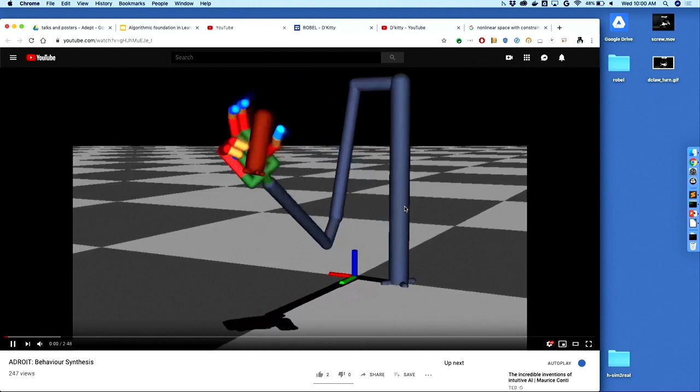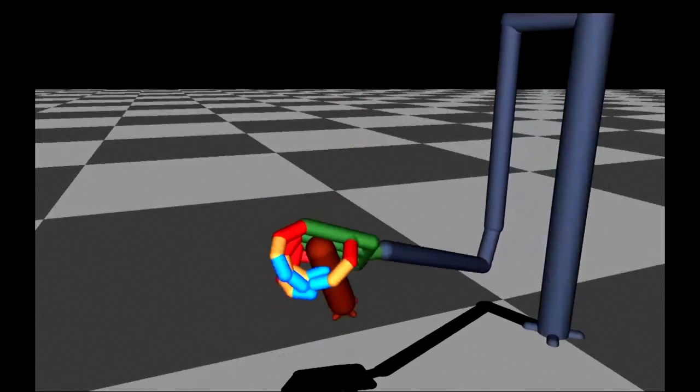Using these techniques, we have been able to show very dynamic movements of this order. Roughly, the dimensionality of the system we are talking about is about a 60-dimensional system. We have full access to the ground state and full access to the dynamics function here. The objective here is there is a hand with about 30 degrees of freedom, and a 6 degree-of-freedom object randomly falling in the scene. Your objective is to stabilize the object—you know it has to be up there in the air somewhere, and all the details of the movements are automatically synthesized.

You do not tell anything about the details of the movement, so that's the beautiful part. When you have access to the dynamics, we have planners that can do amazing things.

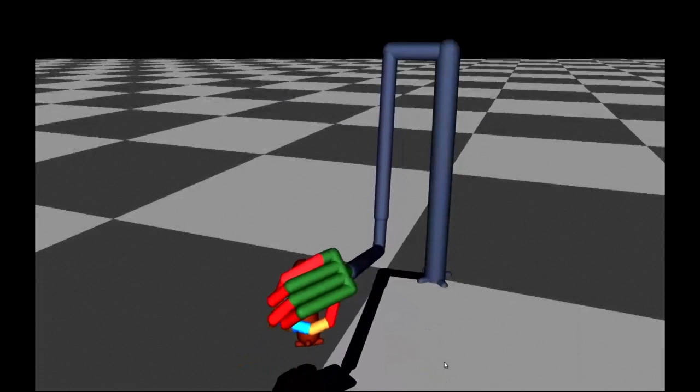And you will see it fails. It's trying to slip, and it kind of re-optimizes, which is one of the lessons, that fast re-optimization can give you a lot of things. And another beautiful part of this is it's reusable machinery, which is also something we want.

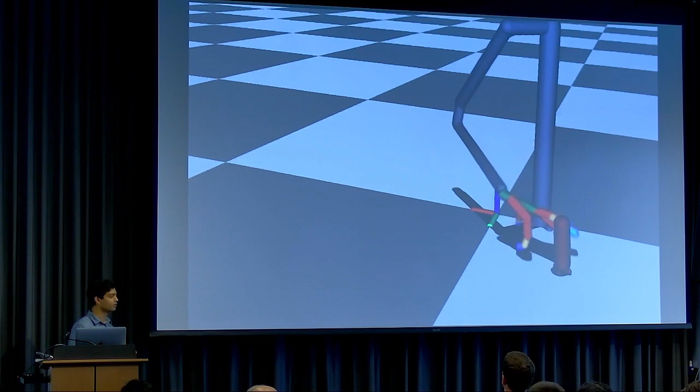It can take the same machinery, we ask it to do typing, just change the goal state to something that says typing, and you can on the fly keep updating the goal. Since it's constantly replanning, it adapts, it does nice things.

You can apply perturbations, replan, etc. Things glorious, everything happy, robotics is solved, we can go home. All right.

I want to take my take on why I think MPC actually works, and it does make sense in the real world. When we are executing, we are never executing to the optimum. So even if we know how to get to the optimum in a provable way, it probably doesn't make sense to spend that compute to go to the optimum. You're only going to execute for a little bit, so your best bet is to get a good plan in this small narrow horizon. So focus your compute over there, get the best update you possibly can, and leave everything to hope.

But can we do better than hope? Yes, you can do better than hope, which is what we call the value function. You put the value function at the end, and that kind of gives you the hope. You extrapolate based on the hope. But the thing is, we overfit to the current situations, and you just hope that carries forward. And then replanning does the magic for you.

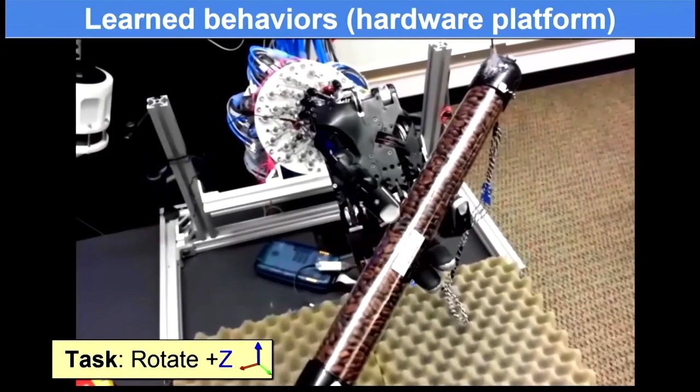Let's start looking into a demo of what we can do over here. Again, a human hand-shaped robot. What we are trying to do is rotate a free-floating object in space along different axes, X, Y, Z, and you can see that over there.

Most of these behaviors are learned with 60 trials. So we are not talking about thousands or even millions, thousands. We are talking about just 60 trials.

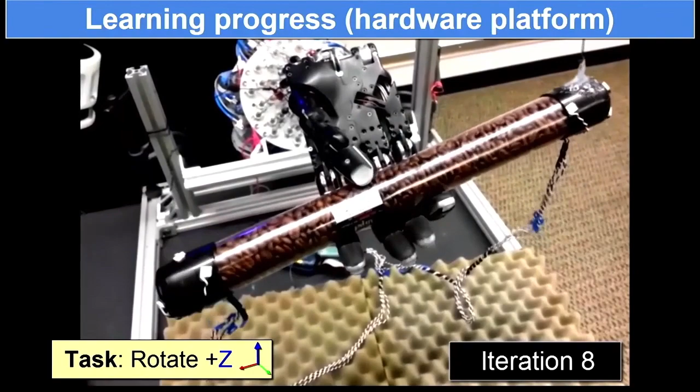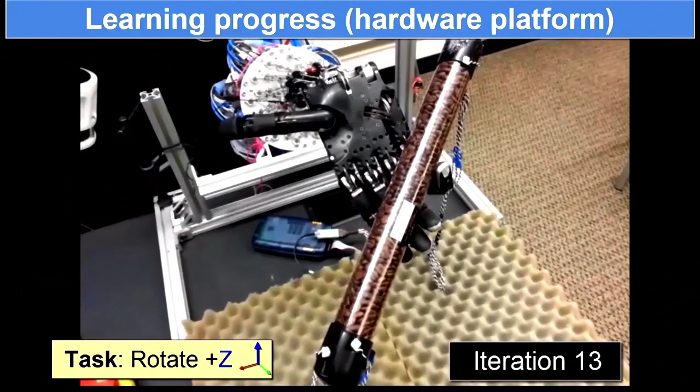Agreed, these things are very simple. We are trying to do simple things like rotation, but if you see the kind of behaviors that need to exhibit in order to get those things right, it's quite complex. The pinky has to push, the middle finger has to pivot, the thumb has to get in and out, and the whole system has to stabilize, because initially what you'll see is that it will just drop the whole thing. It doesn't even understand how to stabilize the system, and it'll start dropping the system.

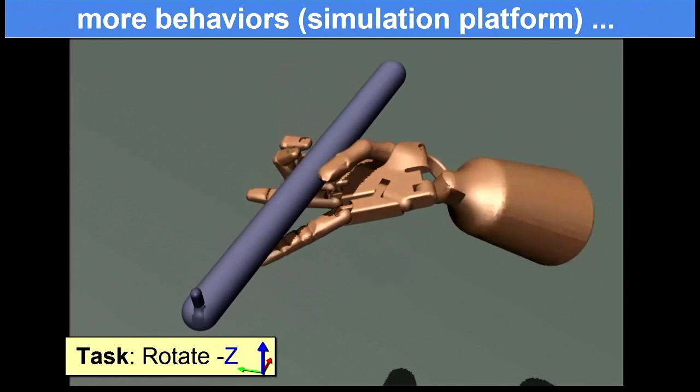And it is general, again, in the same sense that you're building a model. Given the model, you can do a lot of things. And since you can build a model easily, a benefit of MPC, you can repurpose all of those things into different behaviors.

Over here, each iteration is roughly 5 rollouts. So about 12 iterations is about 60 trials that we have done. So what we're able to show right now is an extremely sample-efficient process.

It can work with contact dynamics, which presents a lot of constraints in the actual dynamics. So these are not smooth dynamics, and it does work in a real system.

But there is an interesting thing going on over here, that it did converge, but what happened here? What we ended up doing in this case is you start the system at the same place initially, because it's not good. So you want to help the system by starting it more or less in the same place, and it's updating its own estimate so it iteratively gets better and better. But the moment you think it has gotten better, now you start destabilizing the system.

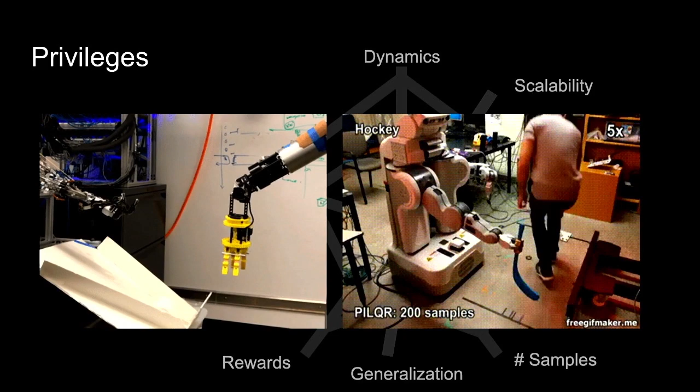This is, by the way, I want to show how resets, for example, are taken for granted, and it takes either 4 months for you to design a reset mechanism, or a grad student spends 4 months doing the reset for you. This was me as well when I was doing the cube rotation, the tube rotation thing. So a lot of these things are the real bottlenecks now as algorithms try to scale and actually go out into the real world. I think a lot of these assumptions are really where things are weak, and we need to hit them hard.

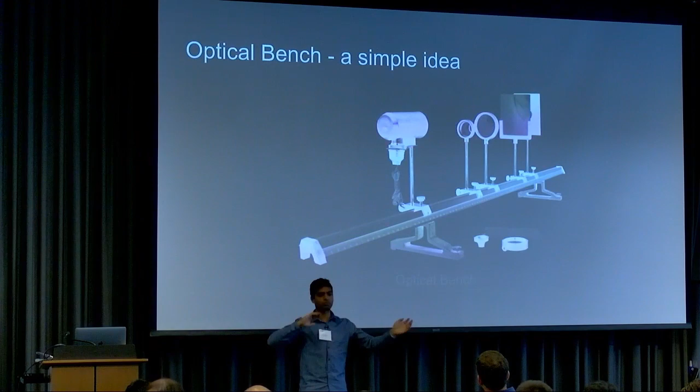Okay, so demo time, I'm going to give a short spiel on what the demo is and why it's important. Like I said, there is this huge spectrum and axes on which we're trying to minimize the area of all the algorithms, right? But it becomes important to actually be able to probe those settings equally well. This is not where I'm trying to solve the DARPA robotics challenge. This is not where I'm trying to do an Atlas backflip. This is basically pure science, trying to minimize the area of this curve.

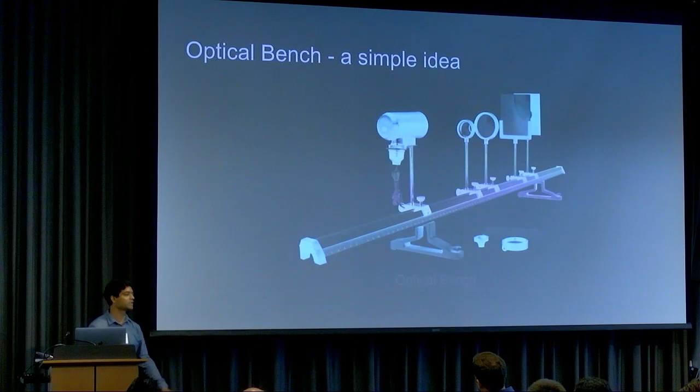So in those settings, I think I take intuition from the domain of physics, where what they did was design something called an optical bench. Most of the Hubble telescope, electron microscope, etc., those intuitions were first tested over there, and they led to bigger developments when people scaled and found the right fundamentals. This is what I think is somewhat missing for robotics right now, that everyone is trying to do a lot of things where things are different, and there are a couple of platforms on which I'm trying to build my intuition, and I'm going to share these things with you guys. Starting today, it's going to be public and online, so feel free to share with everyone.

These are robotics benchmarks for learning. There are some important, interesting things over there as well. So let me try to just show you really quickly. There are a few benchmarks, a few hardware platforms which are very modular. The interesting thing about these platforms is that they're modules you can reconfigure in any way you want. Here are the 3 settings I've shown you guys, but if you have different applications, just go for a different application, and the same thing is going to work for you in terms of software and hardware settings. It's really easy to reconfigure all of those things. That gives you the optical bench illusion, that take a lens out, put a lens in kind of setting.

There are 2 platforms. One of them is called the D'Claw, another one is called the D'Kitty. The good thing about these things is that they're modular, you can compose any number of degrees of freedom. These are super cheap to build, so advisors, please spend some money - give your students one of these.

$3,500, $4,200, great things. In my team, everyone has one on their desk, and the kind of experiments they run is bizarre. You would never have thought that some of the people running experiments right now would ever run experiments.

One of them is Sham's student, Aravind. If you ever ask Sham, will Aravind ever touch a hardware? He's supposedly doing that now.

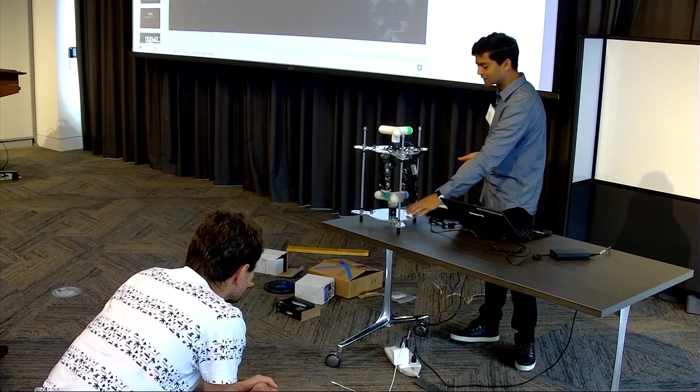All right, so in the first one, the top one is a target, which you can start picking yourself. If someone wants to come pick a target, they can definitely come and pick the target. And the policy is trained to match the target the best it can. The bottom axis is really slippery. So if you just do something simple, it just follows.

All right, so you roughly get the idea of what is going on over here. I'm going to be a little bit quick and go to the next one. I can play these more later if you want to come up after.

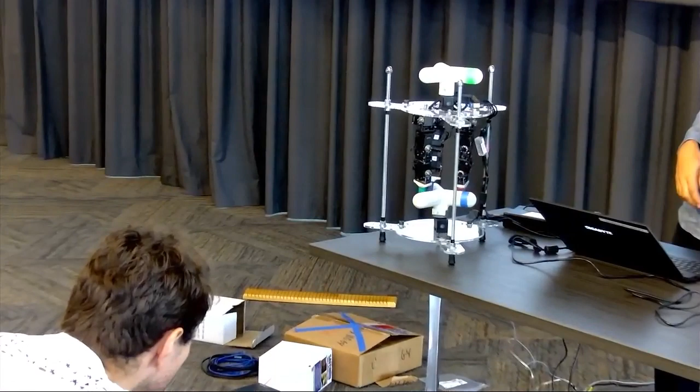Here you just let the top one pick from a random number generator. It's trying to pick a velocity and a target, and the bottom one is trying to match it the best it can. And we can hit it with any algorithm. You can just study different algorithms. It is robust, self-sufficient, independent, so you can run most of these things remotely. We do run everything remotely.

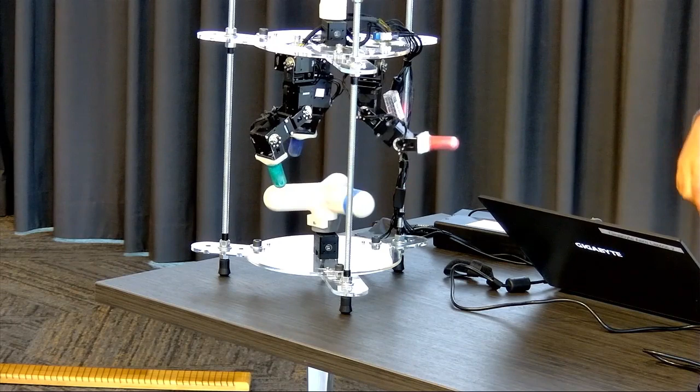All right, so that's a manipulation platform. We just took the same thing, put 4 of them down there, and that's a locomotion platform now. So I'm going to make a fool of myself here, but bear with me because there is no tracking in the room. So it is completely running blind, but at least I can show you that the policies we have been able to learn on these simple systems are robust enough that it can stay upright and handle all of these things by itself.

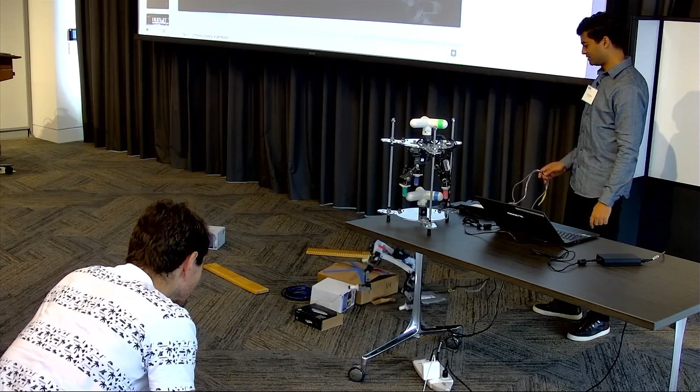So yeah, it doesn't have any tracking, so it doesn't know where the target is. I've roughly given a target which is in the front. So that's a reset. That's a reset. It didn't fall down. It's a reset. It's asking you to go again. So you see the kind of policies and behaviors that it exhibits.

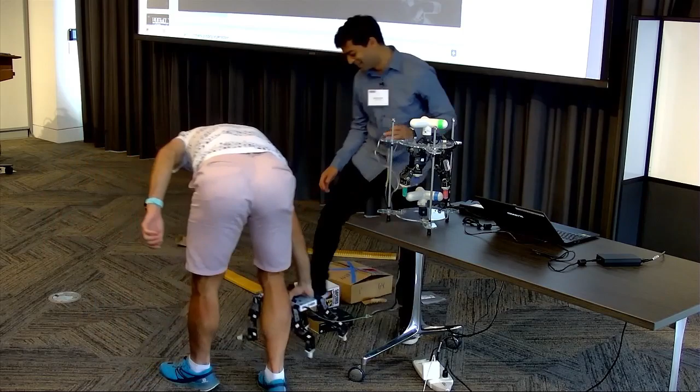It's okay. Can you? No, don't pull the wire. You put a leash. Yeah, I should push the leash. Yeah, I tried to put a reset so it doesn't go far enough.

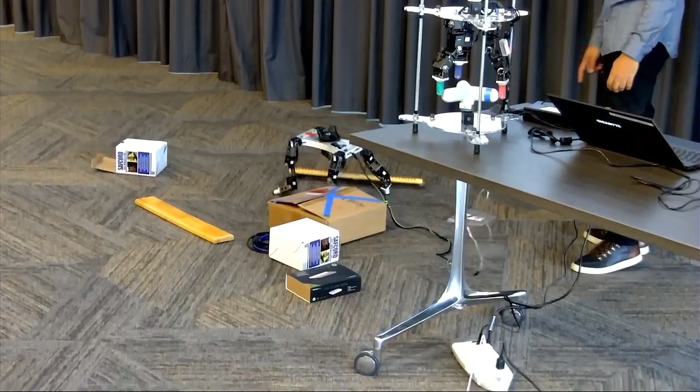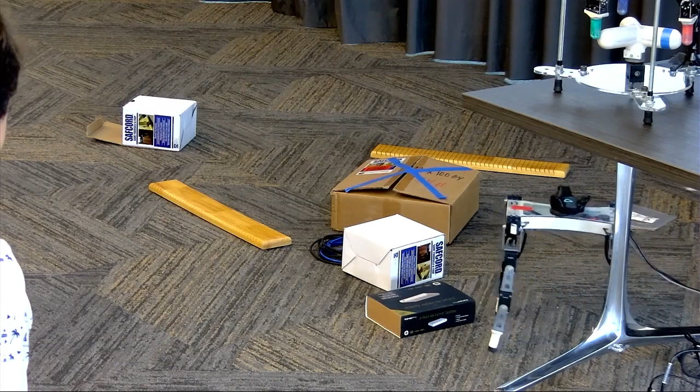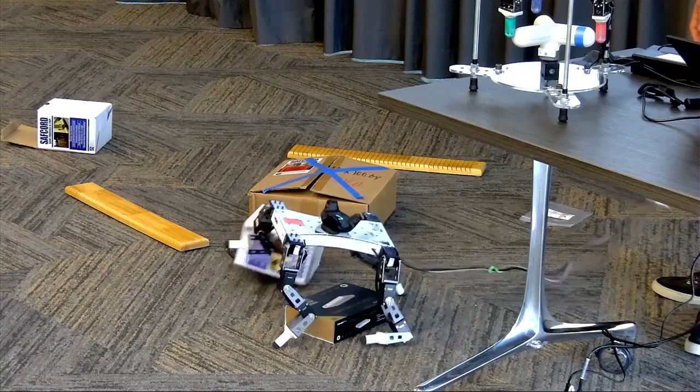But look, like you saw probably, here's a different friction, completely different friction, and it still understands how to handle those things properly. And these are the systems that I showed in the coordination videos where we have multiple of these systems. We have made a small house for them now where they kind of live together, explore the world, figure out where the kitchen is. The best thing is, we call it the kitty, so it's a cat robot, but it doesn't poop, so you don't have to clean up the poop.

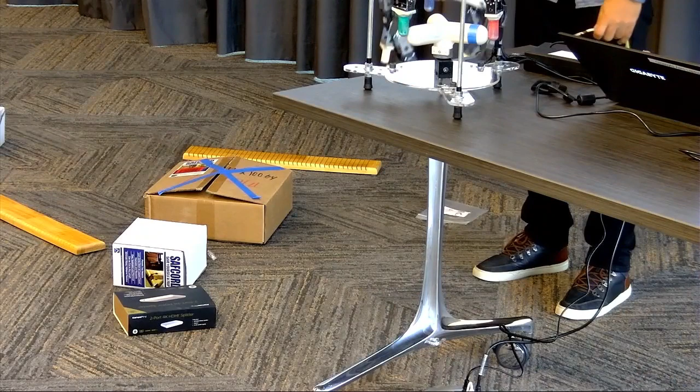Actually, I wanted to ask you this last week as well. I'm really curious about your thoughts on this. One of the things you mentioned that's important to look at is reset. And it seems like these benchmarking platforms are designed in such a way that if I make mistakes or perturb the system a small amount, it's basically stable. It doesn't necessarily trigger a reset, or resetting seems very, very easy.

I'll try to figure out how to say my broader point. It's not totally formalized in my head yet, but the thing I'm a little concerned about is that a lot of the hardest problems in robotics are ones where a small perturbation to the decision you make results in potentially a catastrophic failure. Correct. For example, if instead of a four-legged robot you had a bipedal walker, it's a lot harder to reset that system, and a small mistake causes it to fall over and require a reset.

Yes. Another example is the rally car. If you're in slip and you take the wrong action, reset might require rebuilding the car. Correct. So what I'm wondering is, do you think these benchmarks make sense for machine learning in that it's easy to collect lots of data, and are those problems really the most interesting ones for robotics?